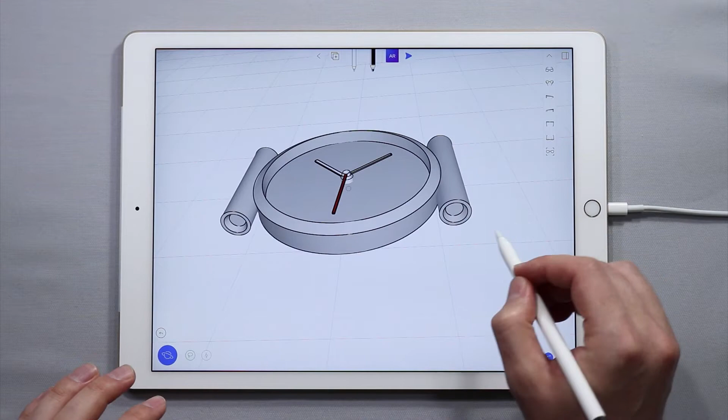My name is Nico, and in this tutorial I am going to show you how to create the wristband for this watch. In part 1 we created the main timepiece, and in part 2 we created the little side elements which will interface with the wristband. In this third tutorial we are going to make the wristband. Let's jump right into it.

I'm going back to the front view here, and I'm going to simply draw a curve. You can draw a curve in the shape of a wristband if you want. You may have uMake autocorrect it. If you don't want that, you can tap undo once and it'll give you the initial curve. But if I select this curve, I'll probably have more control points than I want.

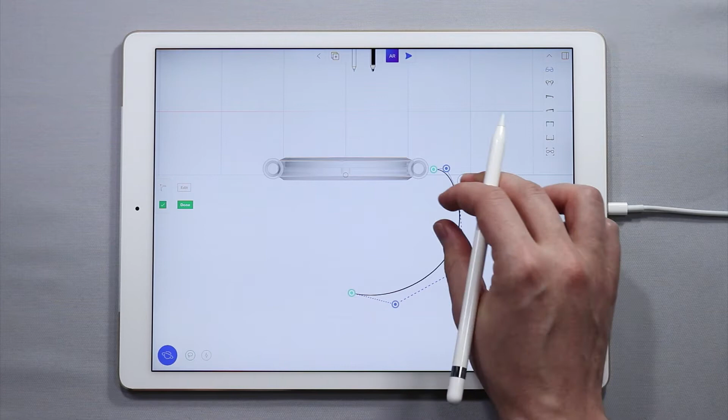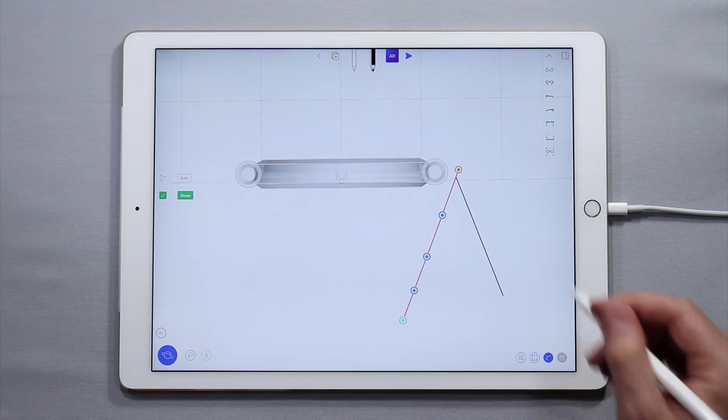If I tap edit, that's actually okay, not too bad, I can use it. But my general technique, if I want full control over my curve, is to just draw a line like this, select it, and add the points to my liking. Usually I'll only need about 5 points for a wristband. I'm going to drag this point in, make sure my snap tools are off, and drag it into where it's going to interface, just drawing something that looks like the shape of a wristband.

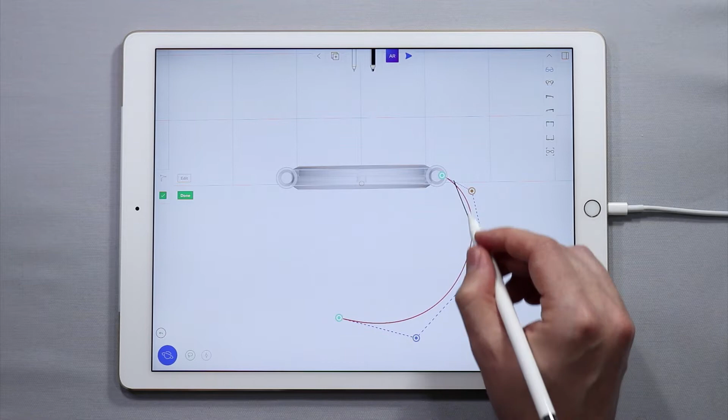Kind of a nice curve. Have it overlap the center a little bit, because it probably would. That's pretty good.

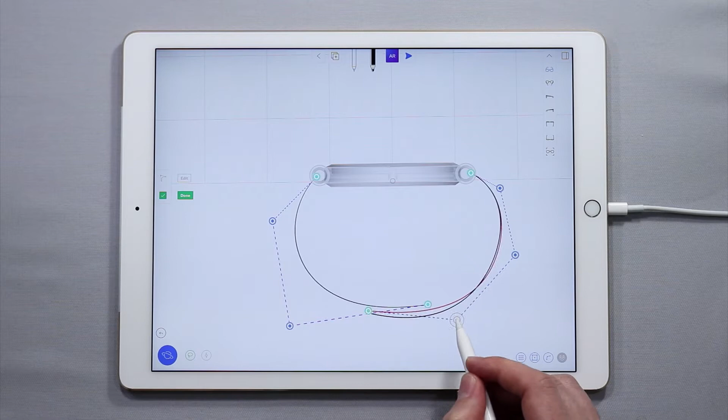And then for the other side, I'm going to do something very similar. Just draw a curve, edit this, and you can edit both of them together to make sure they overlap and look good together. Alright, so now we have those two curves.

If we orbit around, we'll see that those two curves exist in the center of the watch. We drew those on this plane here on the center, on a central plane. So now we want to actually make the wristband.

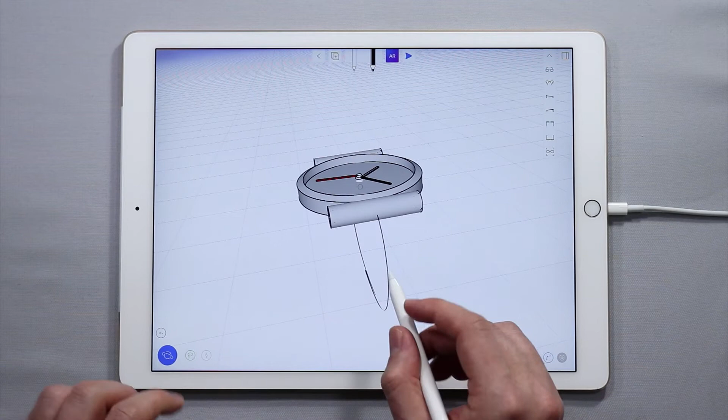Now we can select both of these curves and just use a simple extrude on them. So we could go to extrude, tap two-way extrude, and just extrude out, and tap done. And now you have a single band.

Now this would be one color or one material, so if I selected that and gave it a color, the whole band would be that one color. That's fine if you want to do something simple, go ahead. This is a great way to do that. Very easy. You can call the band done.

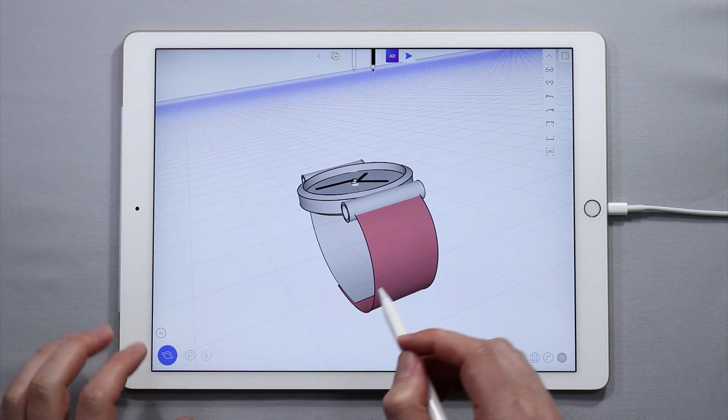However, if you want to do something with a little more complexity for the band, there's another way of doing it. It's still using extrude, but also using extrude in combination with the symmetry tool. Let's do that. I'm going to back up here.

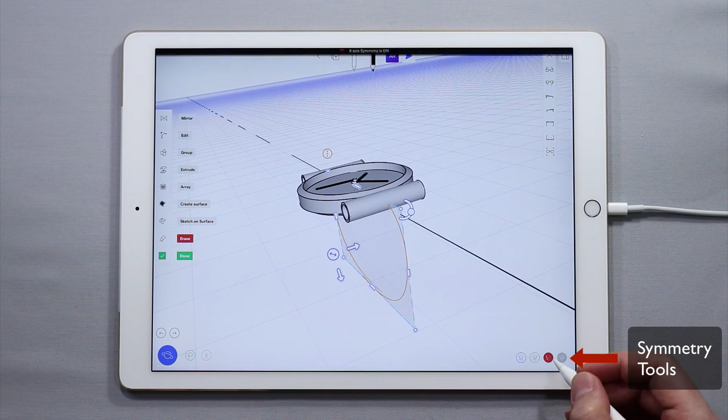I'm going to select both of the curves, and now come down and turn on symmetry. I'm going to turn on the x-axis symmetry. You'll see that I get this dotted line going along the x-axis. And then I'm going to go back to extrude.

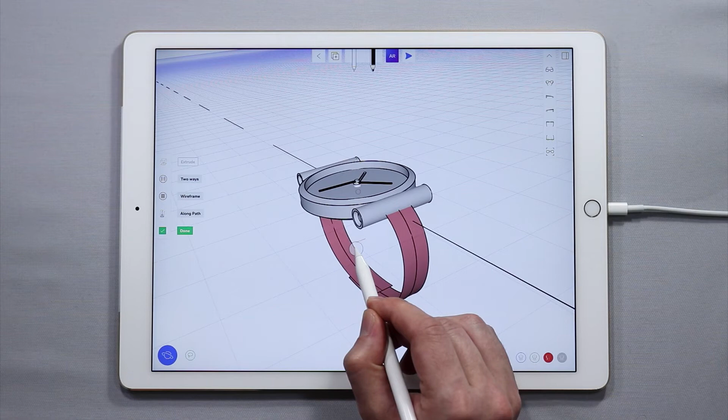This time I don't need two-way on, because with symmetry on, it will extrude on both sides. What I'm going to do is just extrude out one section. There's one portion there. I'm going to tap done, select the outer curves, and then do another extrude. Let's do that one more time. There we go.

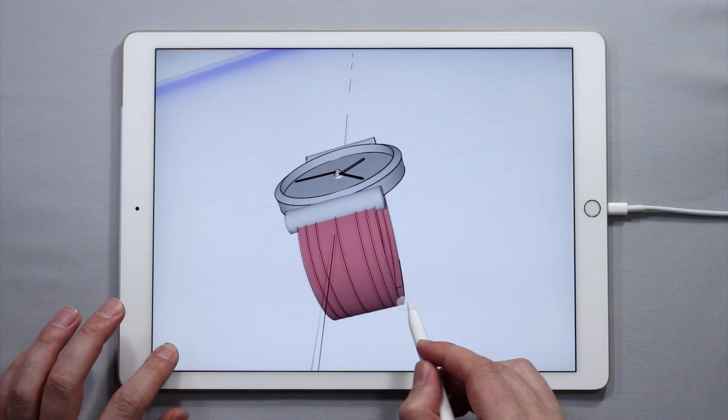So now what we have is something that looks a little bit more complex. But the cool part about this is that we can have a little more fun with the coloring of the material.

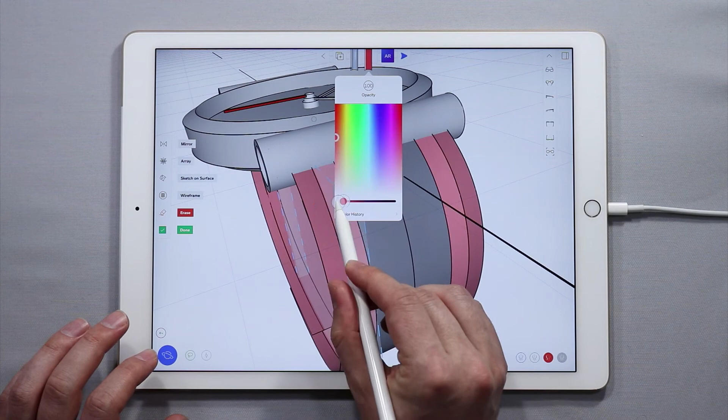So I have this kind of red material here. Let's say I want this to be a dark gray. I want these to be a kind of vibrant red. And I want this to be white.

Now we can have something that is a little bit more complex in its design, has more colors, more colorful, and a little bit more fun to play with.

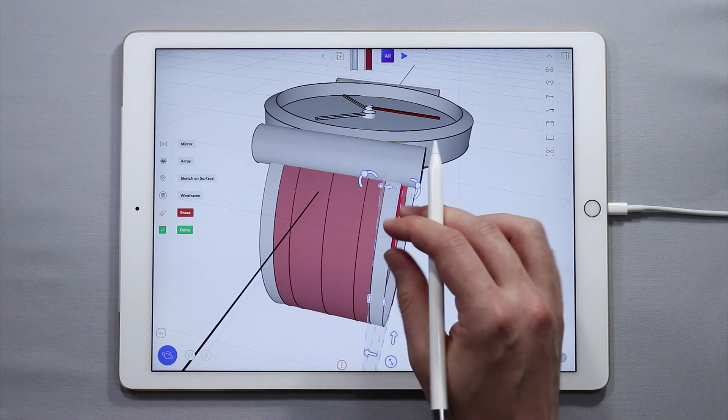And you can change the colors to the same ones very easily simply by using the past colors, the color history. So I had the white, I'm just going to tap white, select this section, go to that vibrant red we did, and then select this section and go to that gray we created. And now your wristband is done.

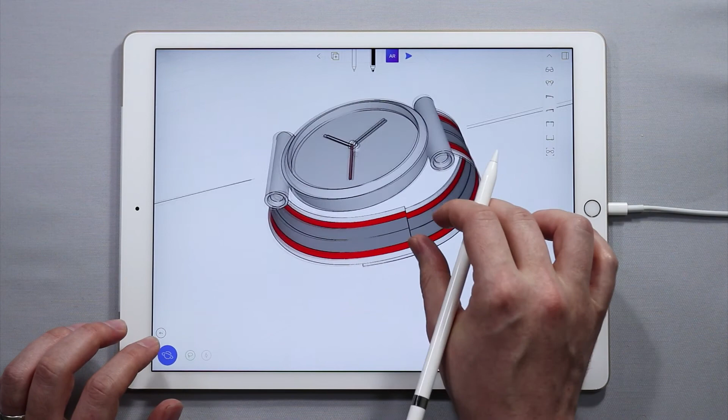So just like that, using the Extrude tool with symmetry or two-way extrusion, we now have a wristband that looks pretty good. It's pretty fun, and you can add multiple colors to it, kind of create it as you want.

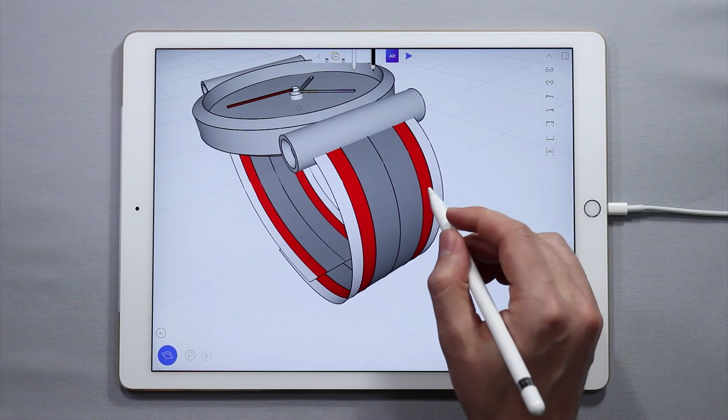And lastly, if you turn symmetry off, since each of these are their own individual surfaces, you can treat them as individual colors. So if you want to do a rainbow color scheme, you can do that.

All right, so that's it for this tutorial on how to create the wristband for your watch design.